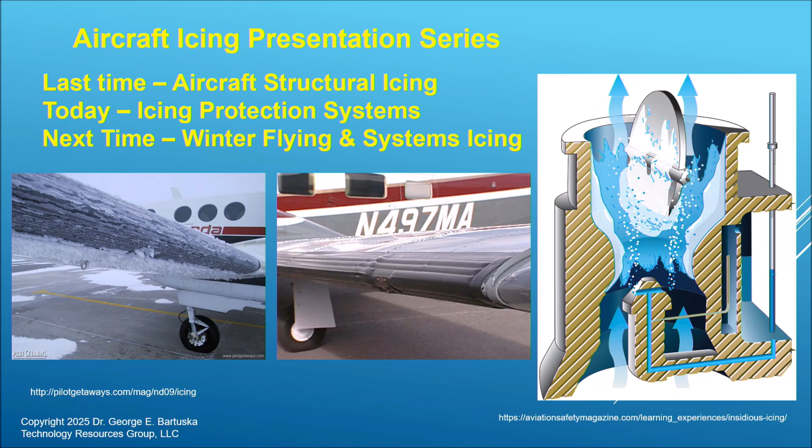Icing is a very complex subject, and this is normally a one-day seminar, so we've broken it up into 3 sections. Last time I talked about aircraft structural icing. Today we'll talk about aircraft icing protection systems, and next time we'll talk about winter flying and icing.

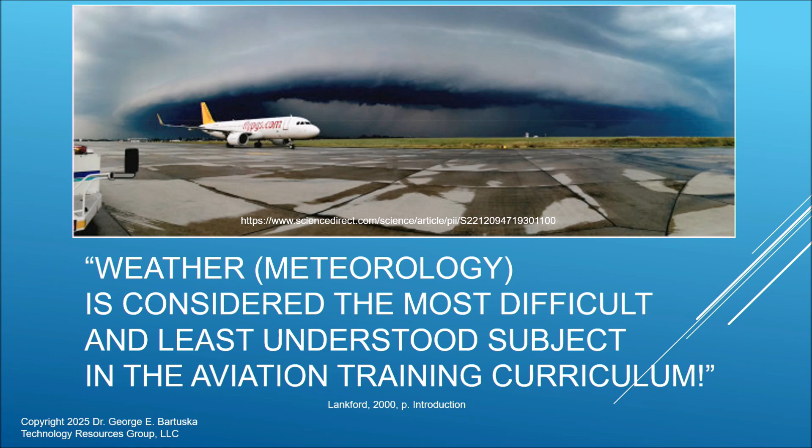Weather or meteorology is considered the most difficult and least understood subject in the aviation training program. That's why we're here. Both in the NASA and AOPA materials, their byline is, quote, 'There is no such thing as a little ice,' unquote. And that's our real theme for today.

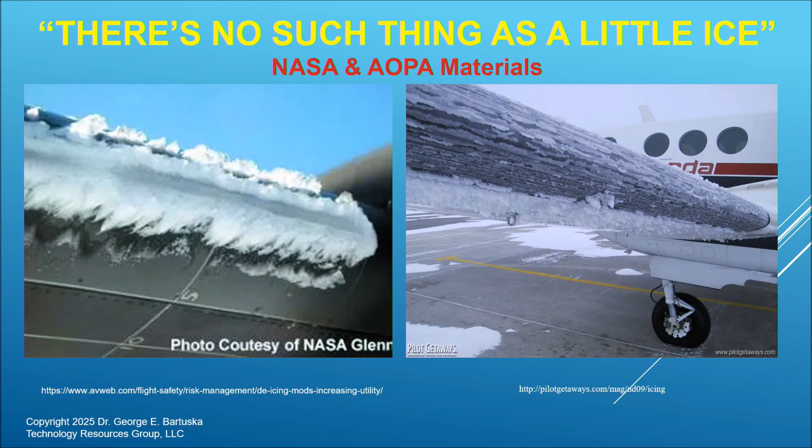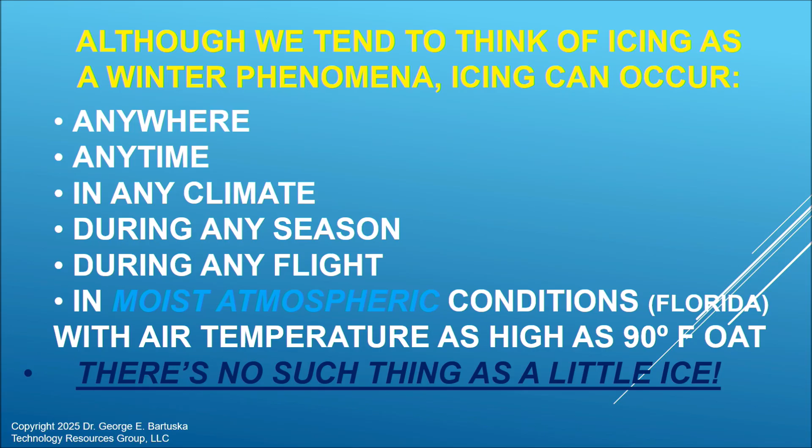Although we tend to think of icing as a winter phenomena, icing can occur anytime, anywhere, in any climate, during any season, during any flight, in moist atmospheric conditions like we have here in Florida, with air temperature as high as 90 degrees Fahrenheit outside air temperature. There's no such thing as a little ice.

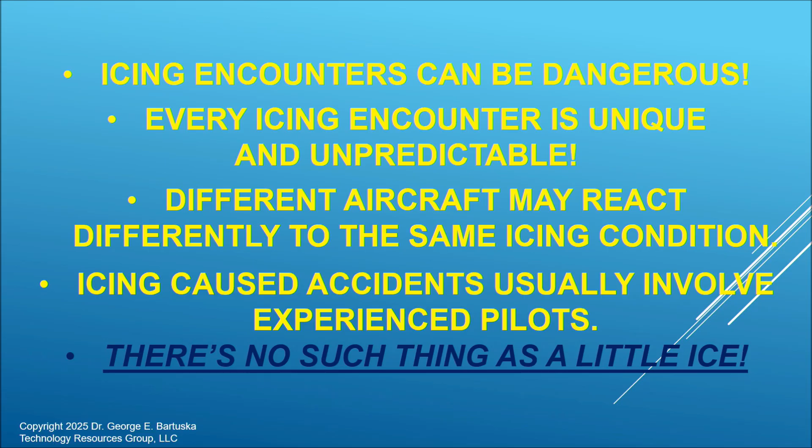Icing encounters can be dangerous. Every icing encounter is unique and unpredictable. Different aircraft may react differently to the same icing condition. Icing-caused accidents usually involved experienced pilots. Let me say it again: icing-caused accidents usually involved experienced pilots. There's no such thing as a little ice.

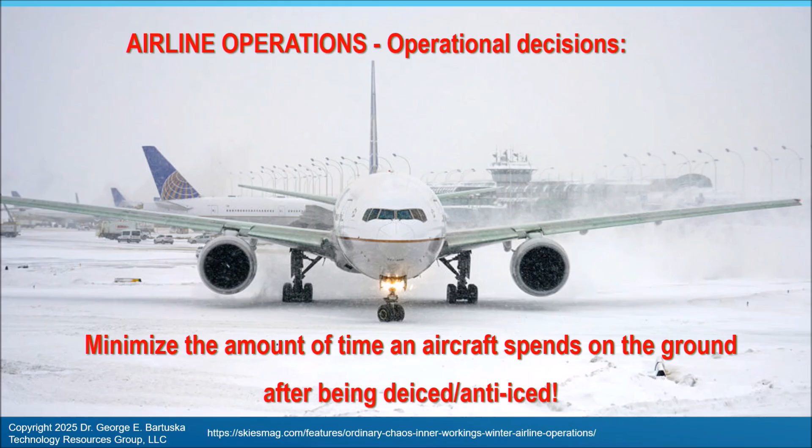In airline operations, their priority is to keep that plane moving, get it de-iced, get it anti-iced, and get it rolling so we can have air traffic. In general aviation, however, you, the pilot, have complete responsibility for the go, no-go decision to fly based on your training and the best information available.

We have to quote FAR 121.629: 'No person may take off an aircraft when frost, ice, or snow is adhering to the wings, control surfaces, propellers, engine inlets, or other critical surfaces of the aircraft.'

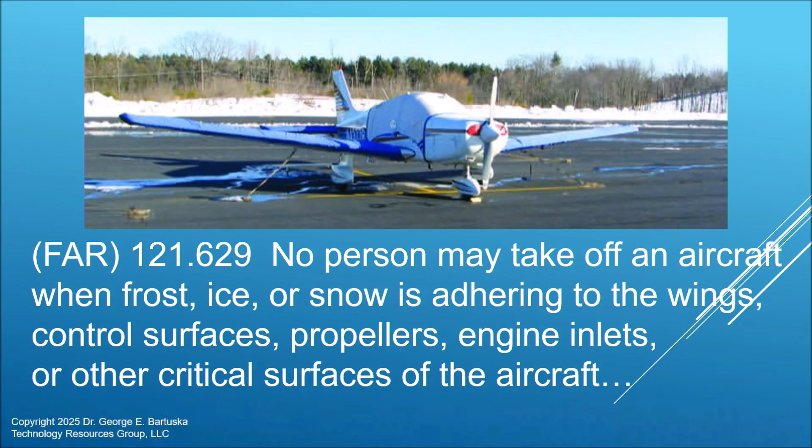A concept developed by the Boeing aircraft company called the clean airplane concept is what we use as a reference when we're talking about the situation of icing. Airplane takeoff performance is based on clean surfaces. All the information in your pilot operating manual is based on a clean aircraft. Because if it's not aerodynamically clean, the result is reduced lift, increased drag, increased stall speed, potentially severe roll problems when you get airborne, and possible abnormal pitch characteristics.

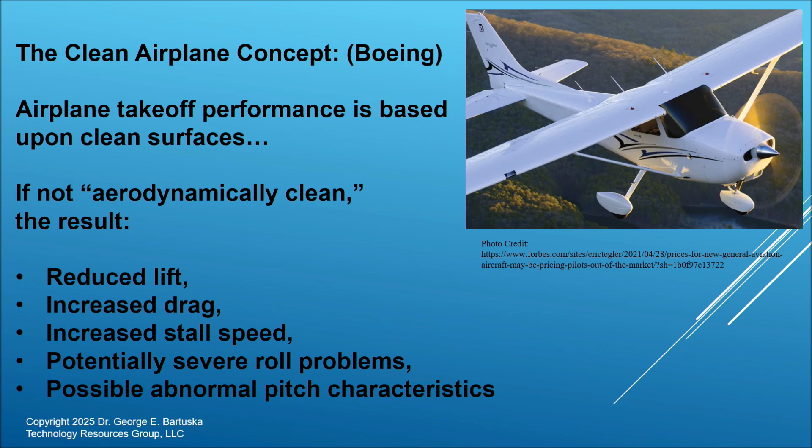Ice can form on an aircraft leading edge surface at altitudes where the freezing starts and above. The average altitude where most icing occurs for general aviation pilots is around 10,000 feet.

Water droplets in the air can be super cooled to below freezing temperature, down to minus 40 degrees, without actually turning into ice unless they're disturbed in some manner. We call these supercooled droplets, or SLDs.

However, the aircraft surface disturbs these droplets, and they immediately turn to ice on impact with aircraft surfaces if the aircraft's not moving fast. If it's moving over 550 miles an hour, there's usually enough aerodynamic heating to prevent this. But for general aviation aircraft, the minute they hit that supercooled water, it's going to turn into ice on their wings. Ice can have a glazed look, we call it clear or smooth ice, or a rough look, rime ice.

We have 3 main kinds of icing: clear icing, rime icing, and mixed icing. Clear icing occurs mostly in cumulus clouds. Rime icing occurs mainly in stratus clouds. And mixed icing, which is a combination of the two, can occur when there's wet snow in the clouds.

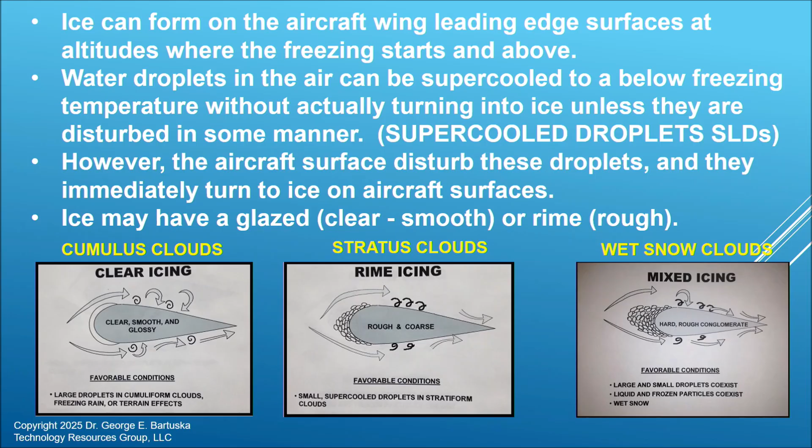Here's an example of clear ice on the upper left, an example of rime ice on the upper right, and a combination of the two in the lower left. The way we keep it clear in our heads is clear ice is like ice cubes in your freezer, and rime ice is that fuzzy stuff on the inside of the freezer that tells you it's time to clean the freezer, defrost it.

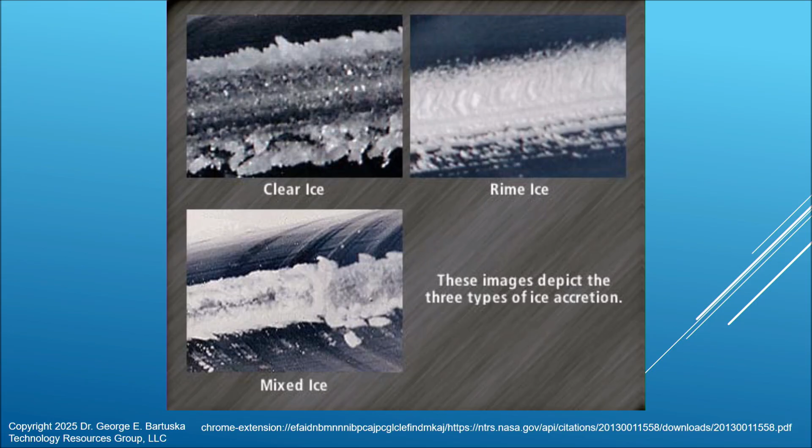Here's the same chart I used last time and I'll use next time. This is out of the Comet Education Program from NOAA. Notice if you're below the freezing level, in this case in Celsius, if you're above 0 degrees C, there shouldn't be any icing because it isn't cold enough for ice to form.

And if you're above minus 40 degrees, most of what's there is going to be crystals of ice, and you shouldn't have any icing. But in between there, and we say the average is around 10,000 feet, so 3,000 to 12,000 feet, there could be supercooled liquid that can turn into icing, or mixed phase clouds that can have both kinds of icing.

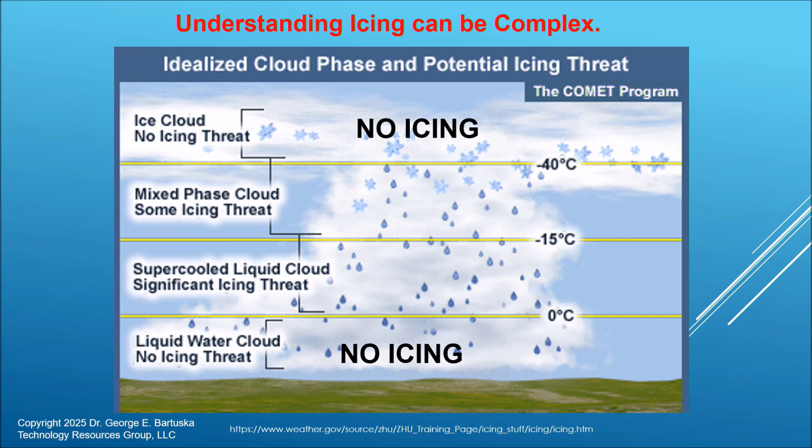Ice research started at the Ames Aeronautical Laboratory back in the 1930s, focusing on routing engine exhaust air to the wing leading edge forward of the main wing spar. With the outbreak of World War II, a need arose, identified initially for the B-24 and the C-46, known to us as the DC-3. All-weather flying with advanced radios and blind flying equipment was limited only by the potential hazard of in-flight icing.

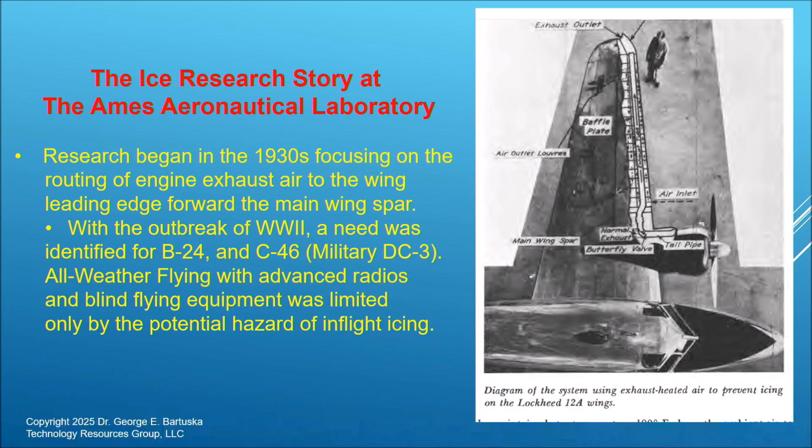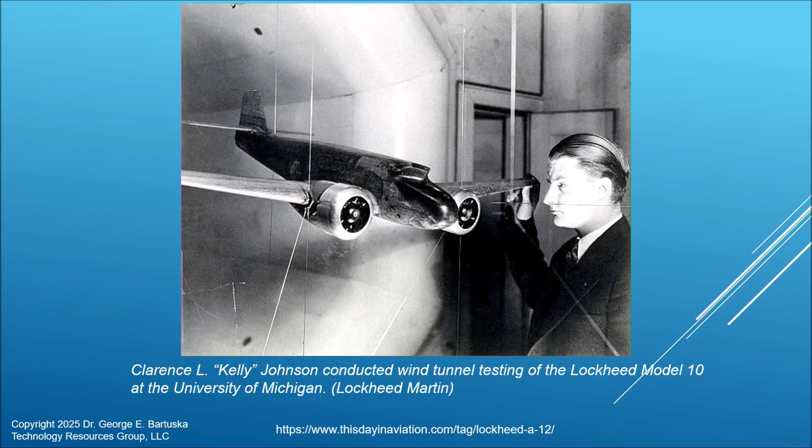The plane that initial research was done on was the Lockheed 12A. Here's a picture of Kelly Johnson and a wind tunnel test of that aircraft, and here's a diagram of what that initial research and development situation looked like. They're ducting the exhaust from the engine down the leading edge of the plane in front of the wing spar, but the wings are made out of aluminum, and that exhaust heat was way too hot to use, so this was not a doable situation.

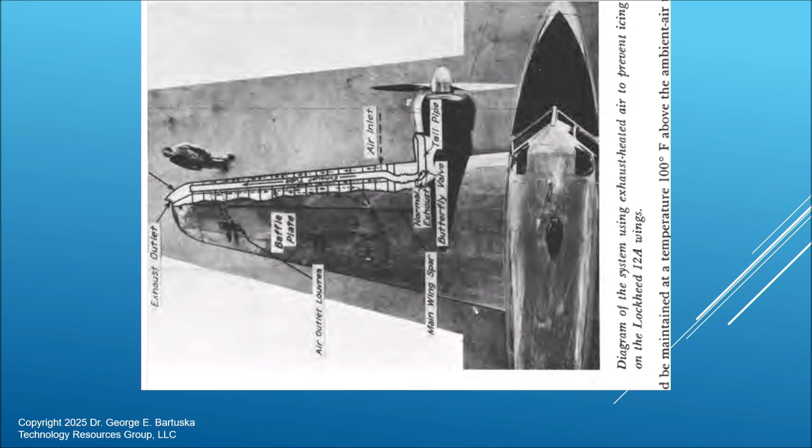Now, there's two kinds of ice removal in aircraft: anti-icing and de-icing. Anti-icing means we're going to be proactive and prevent it from happening in the first place. De-icing means it's already happened, we didn't have a way to be proactive, and now we're going to get rid of that ice.

Anti-icing means being preemptive, turn on before the flight enters icing conditions. This includes thermal heat, prop heat, pitot heat, fuel vent heat, windshield heat, and fluid surface de-icers.

On the other hand, de-icing, which we do after icing has occurred, is used when there's been significant ice buildup, or icing that you can detect. It includes surface de-icing equipment such as de-icing boots, which we're going to talk about, weeping wing systems, and heated wings.

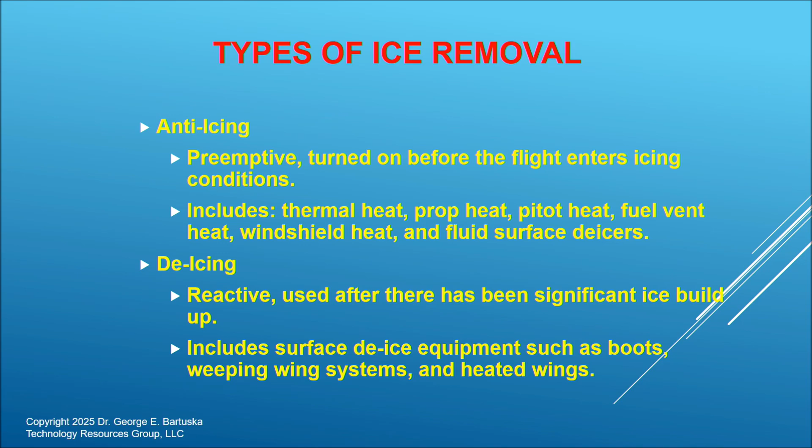Now, the first thing that usually ices up on an aircraft is the propellers. Ice usually appears on the propeller before it forms on the wing. It can be treated with chemicals from slinger rings on the prop hub or graphite electric resistance heaters attached to the leading edges of the propeller blades.

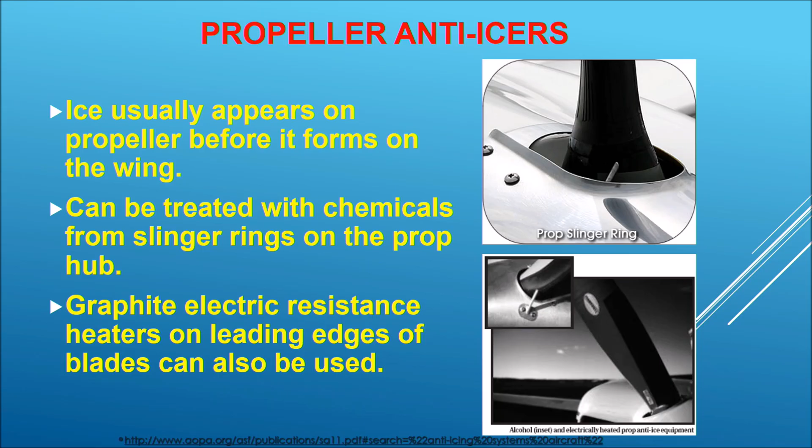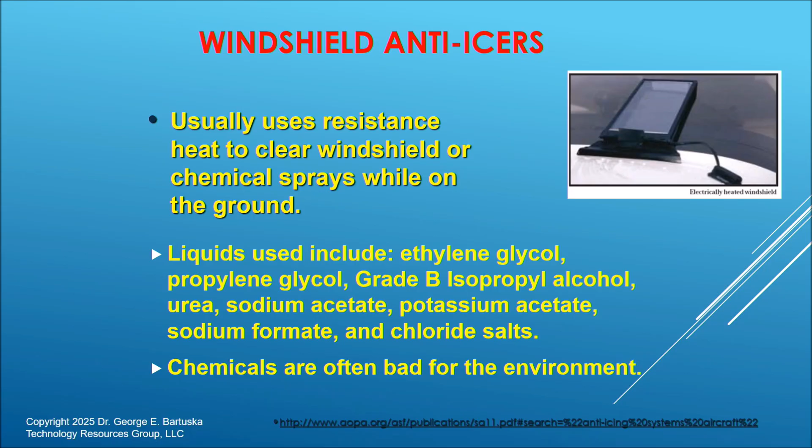Windshield anti-icers usually use resistance heat to clear the windshield, or chemical sprays while on the ground. Liquids used include ethylene glycol, propylene glycol, grade B isopropyl alcohol, urea, sodium acetate, potassium acetate, sodium formate, and chloride salts. But we need to be aware that these chemicals are often bad for the environment, so we got to be careful the way we use them.

Thermal heat. Now I'm going to mention bleed air, and if you have no turbine aircraft experience, that isn't going to mean anything to you yet, so later in the presentation I'm going to talk about what this bleed air is and what the source of it is. Bleed air from an engine is used to heat the inlet cowls to keep ice from forming. Bleed air can also be ducted to the wings to heat the wing surface. Ice can also build up within the engine, so shutoff valves need to be incorporated in the design.

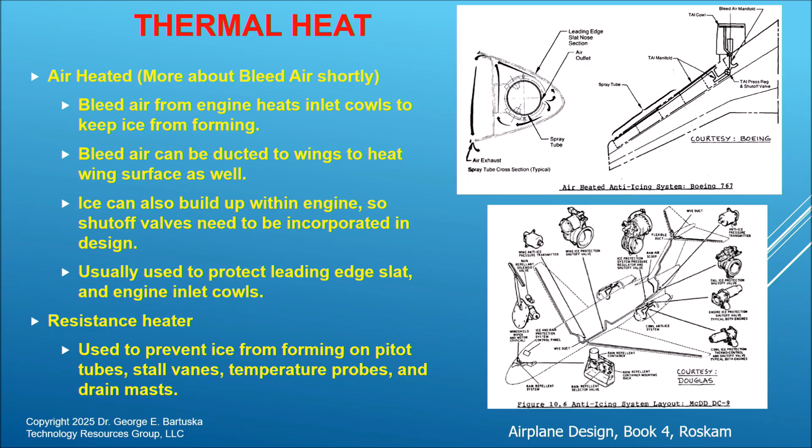This is usually used to protect leading edge slats and engine inlet cowls. Resistance heaters are used to prevent ice from forming on pitot tubes, stall vanes, temperature probes, and drain masts. Here is a Lockheed P-3 Orion.

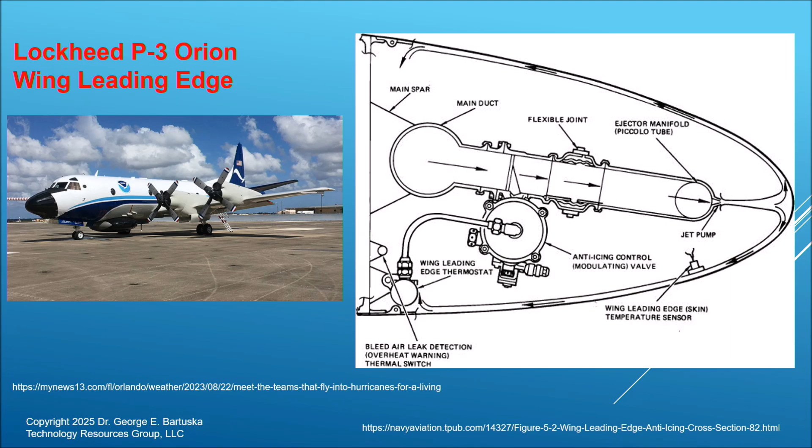This happens to be one of the two Hurricane Hunters that NOAA uses. If you look at that cutaway on the right, we're looking at the leading edge of an airplane wing. You can see there's ducting, and the ducting is providing hot bleed air a path to allow it to flow above and below the leading edge of the plane.

Now, de-icing boots. If all you've been flying is a Cessna 150 or 172 or small training aircraft, you may not have ever seen these yet, but on larger aircraft and older large aircraft, there were and are inflatable rubber boots that run along the leading edge of the wing and tail surfaces. They're pneumatically operated. When inflated, they expand, knocking ice off the wing surface. After ice has been removed, suction is applied to the boots, returning them to their original shape for normal flight. They're usually used on smaller planes and older large aircraft.

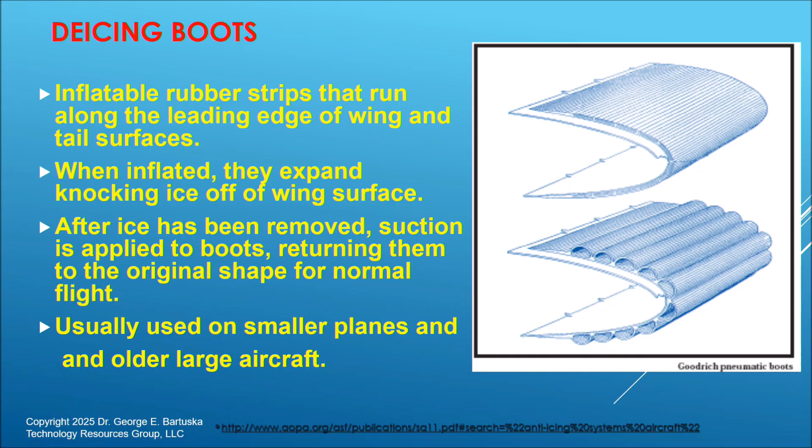These can be span-wise boots or they can be chord-wise de-icing tubes. Here we see an example of them, and now we're going to see them in operation.

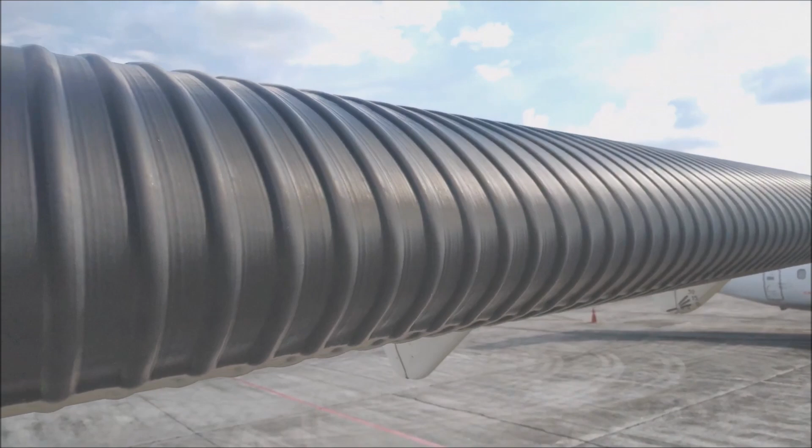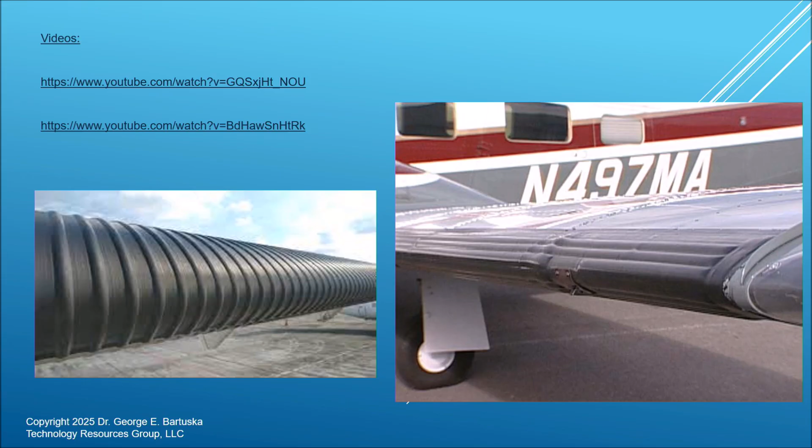I should mention that in the 1950s, 60s, and 70s, there were some issues with de-icer boots where the directions were not to turn the boots on until you actually had ice, because the theory was if you kept them on all the time, icing could form and bridge over the de-icer boot—this was called bridging. But all the new de-icer boots in use today on modern aircraft have solved that problem. The boots go back far enough to deal with anything running back farther on the wing. So if you know you're going into an icing condition, it's considered okay by the FAA to turn the boots on before you see any ice.

Another way of dealing with this is what's called a weeping wing. When you hear the word weeping, you think of somebody crying—well, that's the speed of what the chemical comes out on the leading edge of the wing. Fluid is pumped through a mesh screen mounted on the leading edge of the wing and tail. The chemical is distributed over the wing surface, melting any ice. It can also be used on propeller blades and windshields.

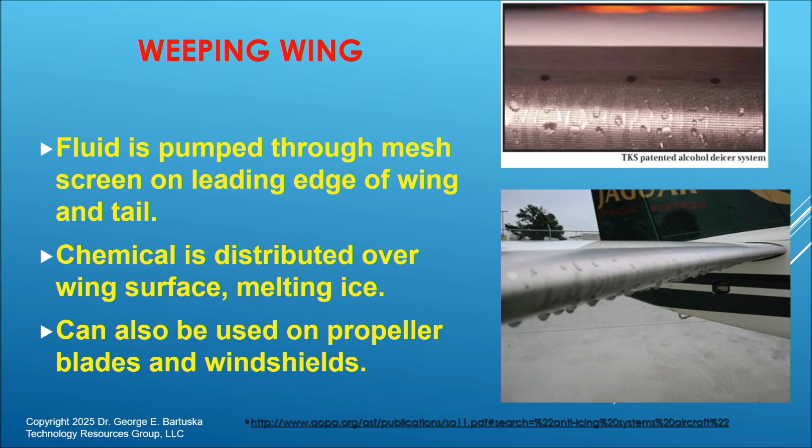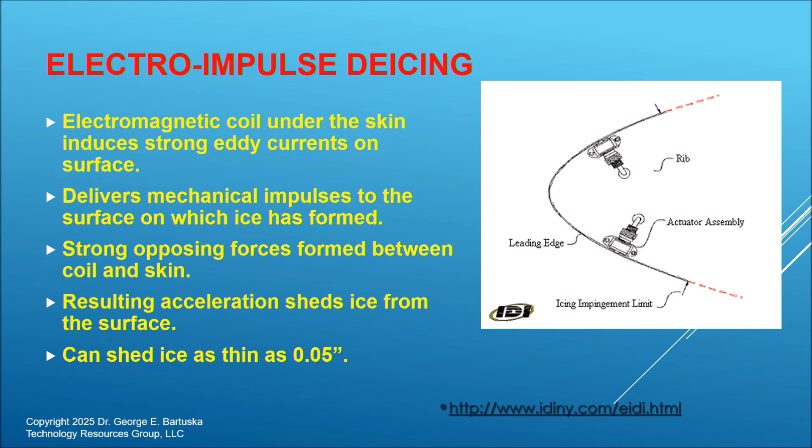Another source is an electromagnetic coil mounted under the skin that induces strong eddy currents on the surface. If you're familiar with a loudspeaker coil of a stereo system, that coil moves because of an electromagnetic coil, and that's essentially what we have here. It delivers a mechanical impulse to the surface where the ice is formed. Strongly opposing forces form between the coil and the skin, and the resulting acceleration sheds ice from the surface. It can shed ice as thin as 5/100ths of an inch.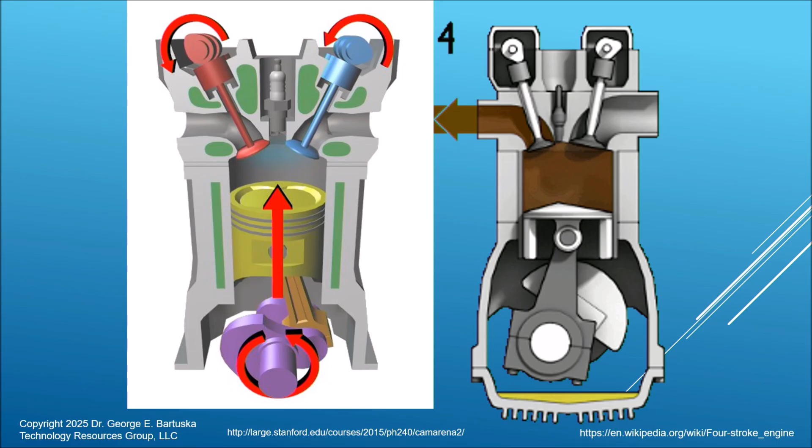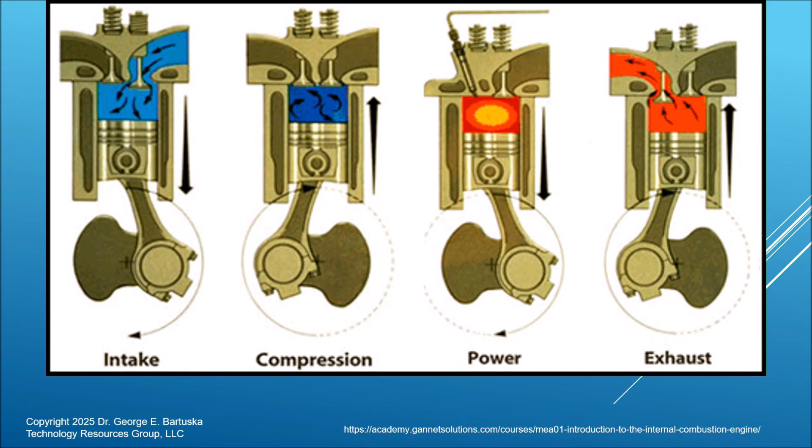Cycle number 1 is intake, 2 is compression, 3 is power, and 4 is exhaust. Here's a review: number 1, intake, where the intake valve opens and the piston comes down and pulls in a fuel air mixture. Then both valves close when the piston's coming up in the compression stroke. Then the spark plug fires and there's a power stroke forcing the piston down. And then the exhaust valve opens as the piston comes up to push out the exhaust.

Well, this is a gas turbine—this is a jet engine. It's doing the exact same thing, only continuously. It has intake, it has compression, it has combustion, it has exhaust. We can show the two next to each other to understand that once again: we have intake, we have compression, we have combustion, and we have exhaust.

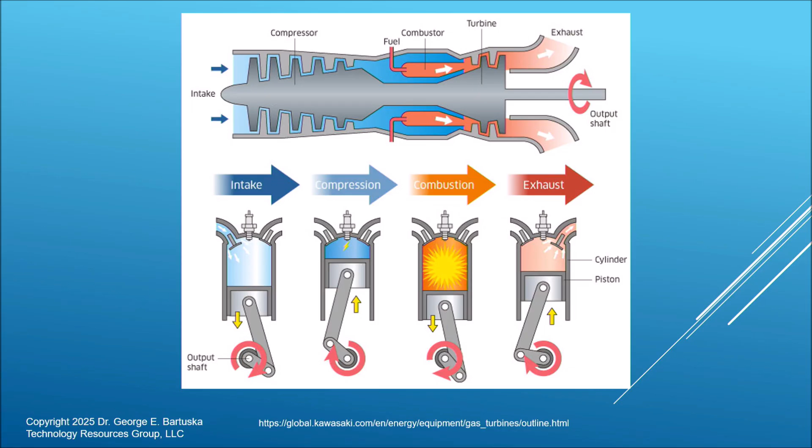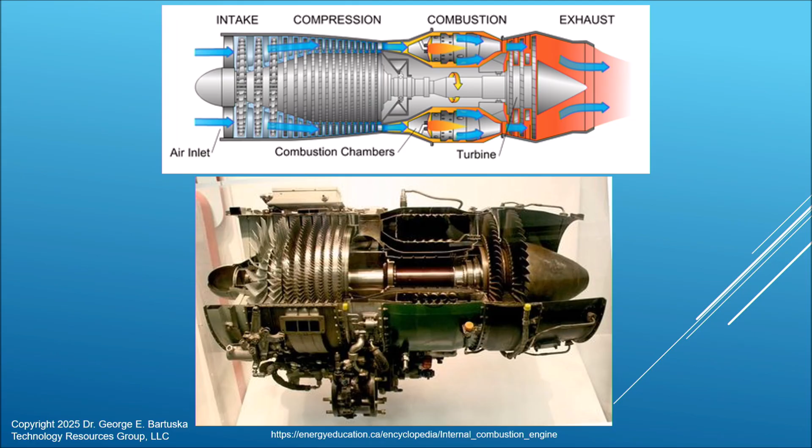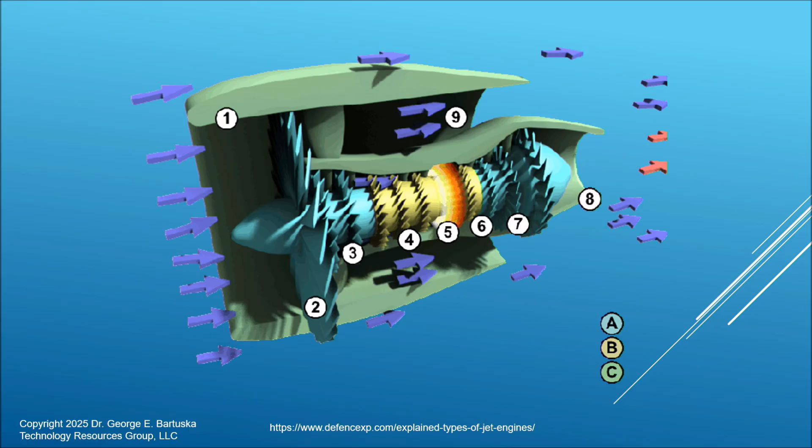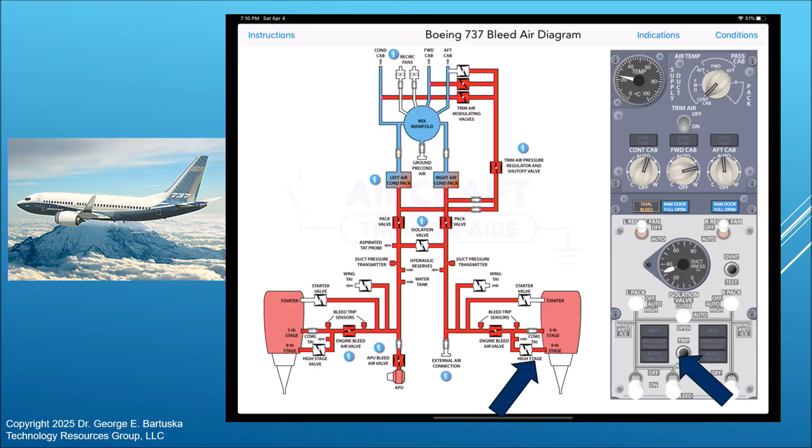Here's a layout of what the bleed air panel looks like on a 737. That lower right part of the panel is the icing controls, and the arrow on the left is a bleed air valve, and up above that is a place that says TAI, which stands for Thermal Anti-Icing System.

A bleed air system uses a network of ducts, valves, and regulators to conduct medium to high pressure air, bled from the compressor section of the engine and/or the APU if your plane has an auxiliary power unit, to various locations within the aircraft. There it's utilized for a number of functions, including pressurization, air conditioning, engine start, wing and engine anti-ice systems like we're talking about today, hydraulic system reservoir pressurization, boundary layer separation enhancement if you have that on your aircraft, and on some aircraft it's used to pressurize the fuel tanks.

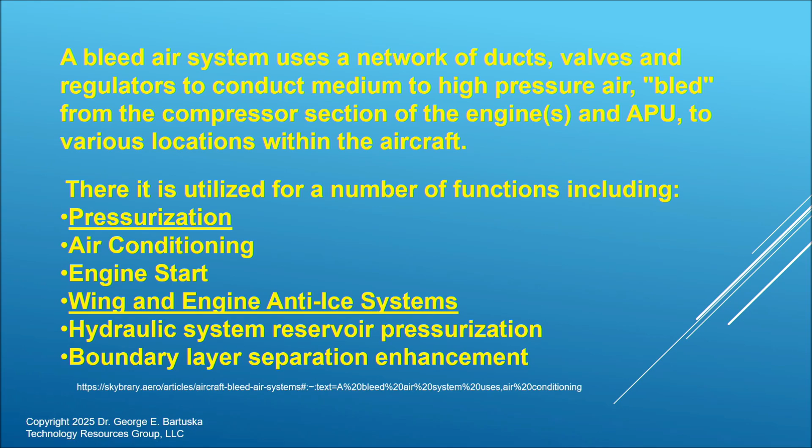So that's a quick look at icing protection systems.